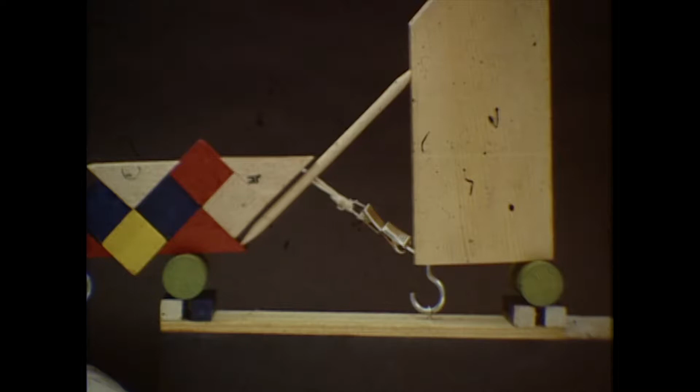This is one of the very first works that I have done. It's nice because it's related to a music school in St. Gallen, a music school for children. They had an auditorium here, and needed to extend it into the next room. So we simply had to take away the wall in between, which was something like 20 feet, or maybe a little less, by 10 feet high. And just to support the three floors above, it was necessary to build a frame. So it came to this piece here.

The idea of the piece is very simple. It has two parts done in metal, symmetric, and they are supported here on a support that goes along the wall. So a person will be something like that—here. This is a simple support, and then there are five tensional elements. Five.

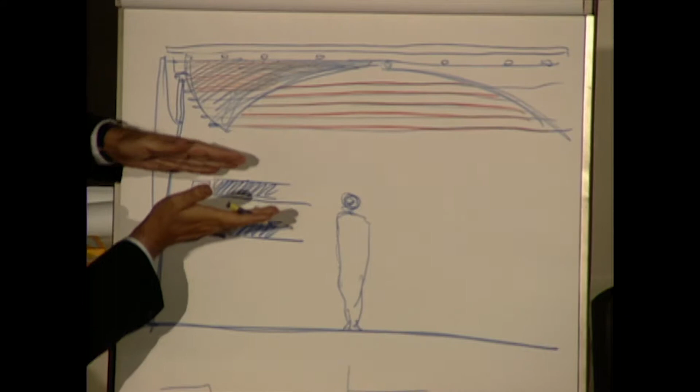I also decided I should not use any bonding system. The key of the evolution of technology in steel is very strongly related not only to the quality of the steel you produce, but also to the links between the steel. When you bolt, when you rivet, or when you weld, this makes an extremely big difference in the use of steel, in the possibilities and in the capacity.

So I decided to not use any link. So, for example, if this element is working in tension, I have to turn it back and link it where the exchange of the forces is happening, at this point behind.

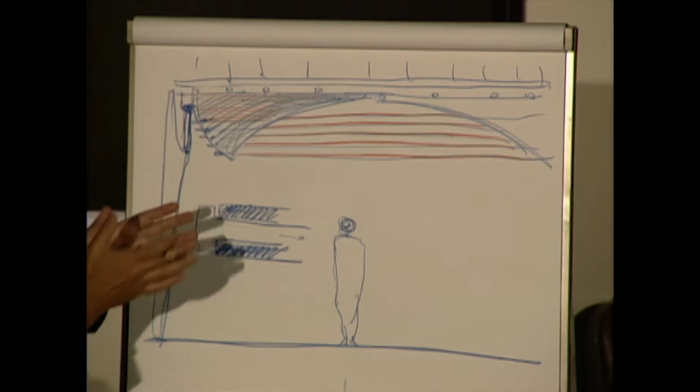Even here, the forces, the weight coming here, and even this small plate — this is just a pendular support, and it is held with 2 pins. So in a way, it is like working with a castle of playing cards, and then, of course, the frame of the building itself is used to stabilize the whole thing — the upper part of the building and also the side, which stabilizes this column and brings the force here.

So this is the first statement.

This was, of course, also possible because the people working on it possessed a very high level of craftsmanship, to make it in a very big and very precise way.

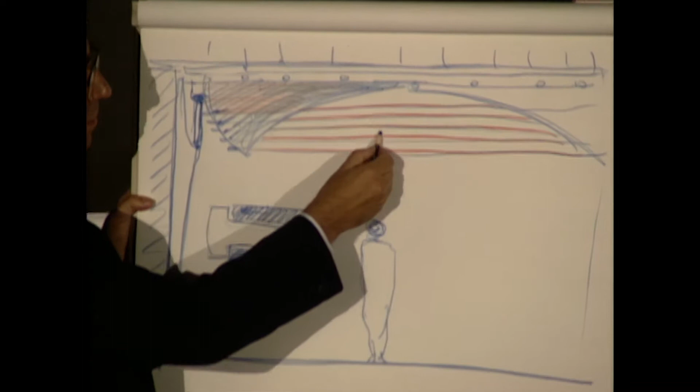So, in this type of approach, there is always a little bit of a place for the 5 elements. In fact, the rotation point is here, and each one of them receives, if not equal force — of course, because those who are more separated have a major movement when this will descend — but in any case, all work under tension.

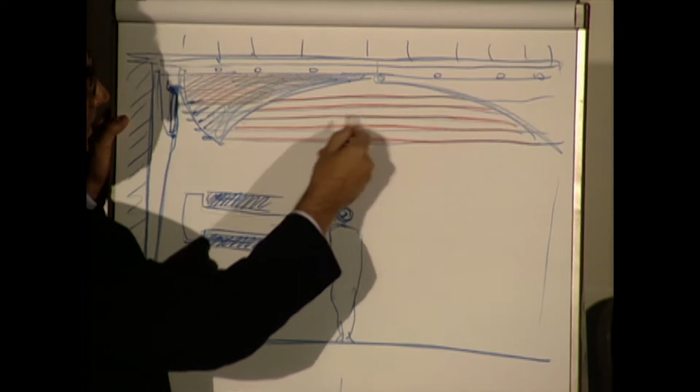I chose 5 and start to do 1, which is a redundancy, you understand? I could also even use 2, and say if 1 will not work, there will be another 1 who will work.

But I decided to do 5 because, as you know, music is read over 5 lines. And I found it is a good reason to introduce this — it could also maybe suggest a guitar or something like that, but this is certainly not the case. The 5 lines, in any case, is something like when you started putting the note. Yeah, okay, you see it here, thank you.

You see it here, the pendular element here, and then the 5 other.

I discovered along the way that the width of the tensional members was so big that they were simply hanging — even though working, I neglected the problem of the own weight of the element. This, for example, in a cable-stayed bridge, will be fundamental, because it will even change the modulus.

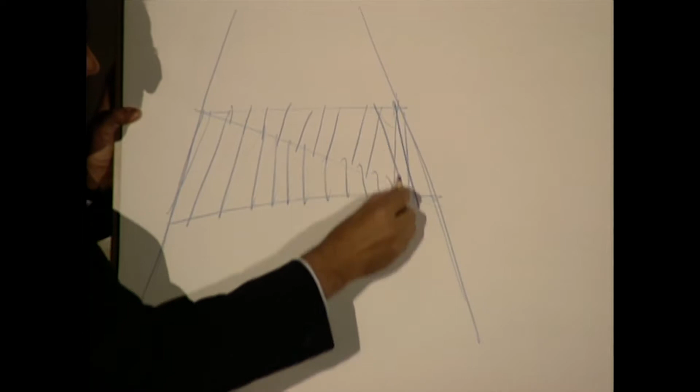I thought it could also be interesting to work with the light, which in my opinion is the control of the light for the particular space. And this is the entrance. The idea of the entrance was generated by the fact that the plan was like that, and then with a diagonal element I create a canopy very strongly related to geometry, which will consist in recreating two cones with a diagonal position arc and with the entrance here.

And this will work like that, and like that in the other direction. And not only like this, but also to have the cross-section with the pipe, which has a certain resistance to the torsion, and will take also the gutter with it, to have it related to the facade.

Even though this has a torsional stiffness that I have maybe used also in other things like bridges, the torsional stiffness of the pipe, in this case I fix it into the top of the facade, with which I create a link between facade and canopy. So the facade and the canopy work together, they are solved in the same gesture, and they are also coherent.

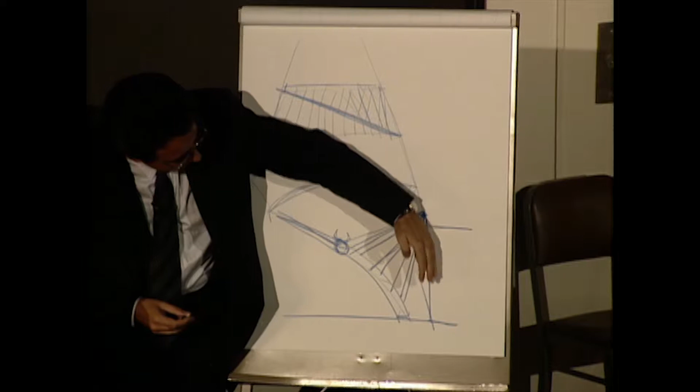It was a small intervention, but for me, as I tell you, it was like a kind of experimental workshop, very, very important. Also, it was a time in which the relation with the craftsman became for me also a kind of prolongation of new school.

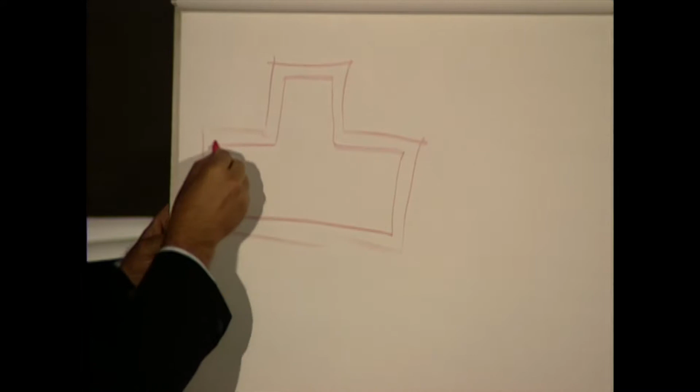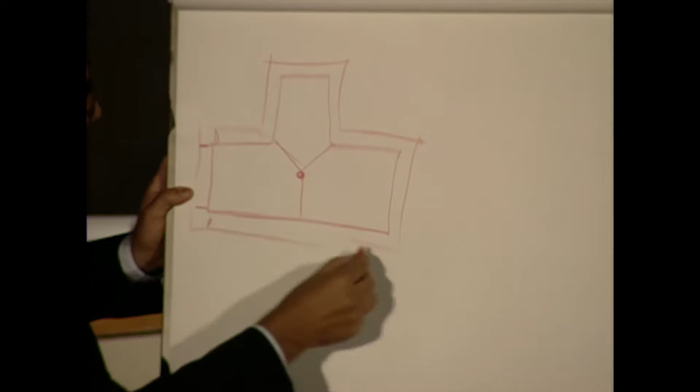And then, having as a plan such a situation, I thought this is the position of the roof. So the plan of the roof was very rigid, and then I chose a center, let's say almost the center of gravity—it's not the case—and then I decided to hold just laterally the corners, in order that it doesn't move laterally, that it is well fixed. But the whole support, the weight, is going through the central column in which also the water is coming down. And then light will descend along the walls, tangentially.

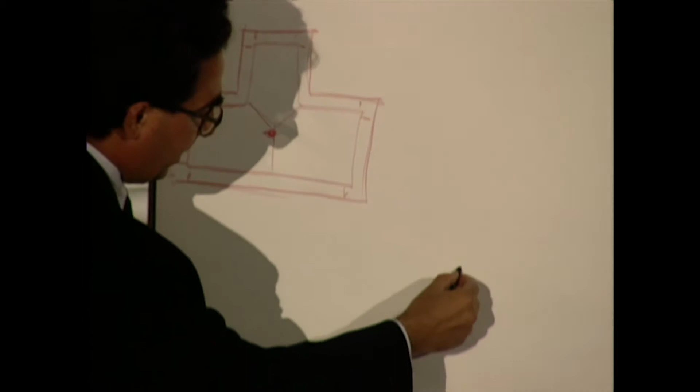Now, about the genesis of the idea, I think it's also important to signify that here I started thinking, let's say, on the idea of a book, an open book.

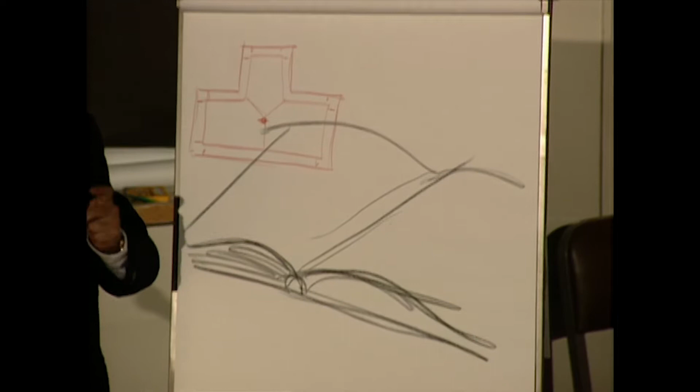Also, as in several other cases, you see very much the idea of the elevation of the roof, emphasizing the idea of floating. The roof should float, which is also a theme where the idea of lightness is very much given, because of the contraposition of materials or of static systems, as with the spindle before - the support of the roof in relation to the roof itself. Even if this is heavy and this is light, you see this contraposition of the two materials.

And the light coming on the side will make the whole roof seem to fly. It means the book, which was in fact the basis of the shell, was also conceived like this.

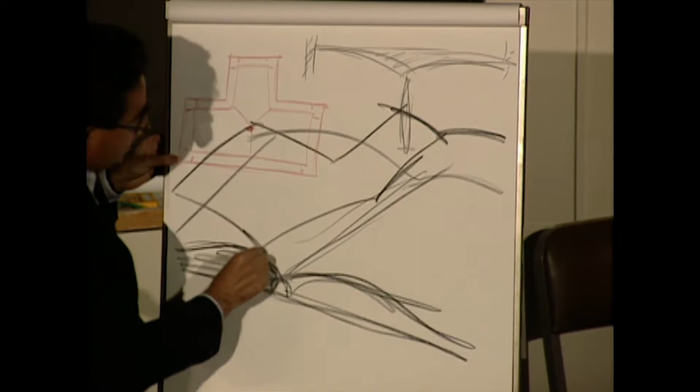So in a way it wanted to become, on the other side, something like a bird or something like that. It is a kind of superposition of ideas, but coming simply from the idea of a book - because if you look, you see it here also. I don't have any, but you see it's the idea of a leaf, or something like that, held in this support.

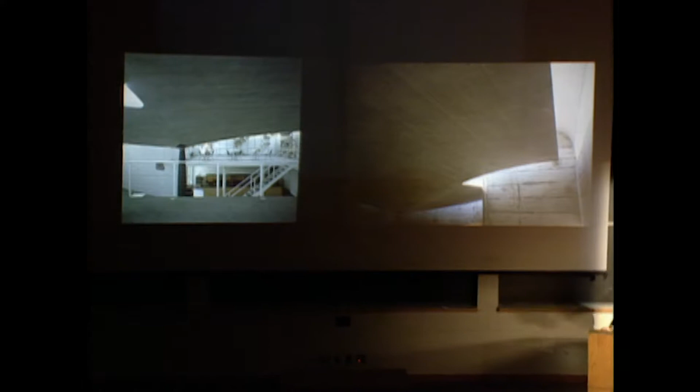You see here also the corners with the supports that I showed before, and the small links just to stabilize the shell, which turns around. And here the interior of the Libreria with the shell, very close - the physical presence of the shell at the interior was also very important.

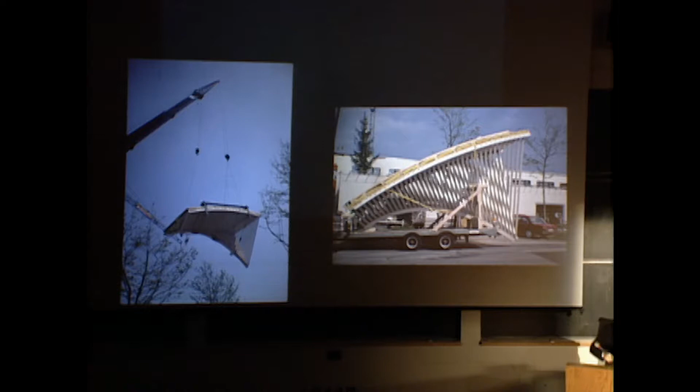Now something that is also very interesting is the construction process - how you build things, how people work. Sometimes the way you decide to build things decides also the shape and width of them, because you have to transport them, produce them somewhere and transport it. It's sometimes very important to recognize those things. In my opinion they have never been decisive until now, but they influence very much the way things are done.

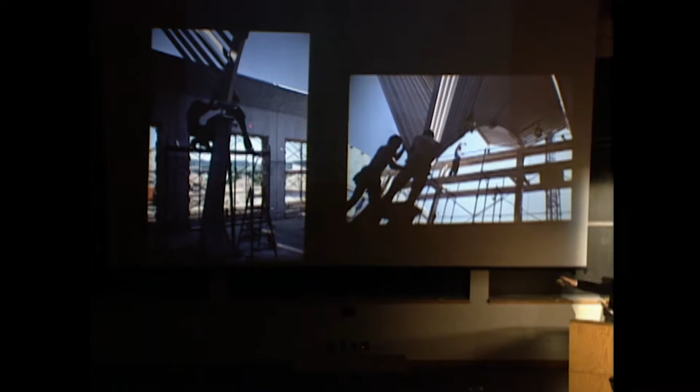Here you see parts of the roof of the aula being transported, and here how they were put over the roof - making a wooden shell there, with arcs at the interior. You see also here how they came down and the joint - this is also very interesting, the fact of the column, the supports.

Something else is very interesting, especially when you precast - I like very much brute concrete, concrete done on site, but precasting concrete can also be very nice. This is a formwork, because the freedom in the choice of forms and the complexity you can achieve is even greater. Remember, concrete in my mother language, in Valencia, we used to say formigó. Formigó comes from forma - in Spanish you also say hormigón with H - which means the material that you can give a form. This may be a good definition of concrete.

So you are very free choosing the shape, the quality, the texture and many other things. When we wanted to produce the pillars of this space, if you have to do a formwork that's 3 meters high, once you fill it you get a huge pressure, and then you have to do a very complex formwork and pay a lot of money for it. So how to do that with less money? Just cut the column in two, make two formworks, pour it horizontally, and then glue the two parts. This is what we have done here.

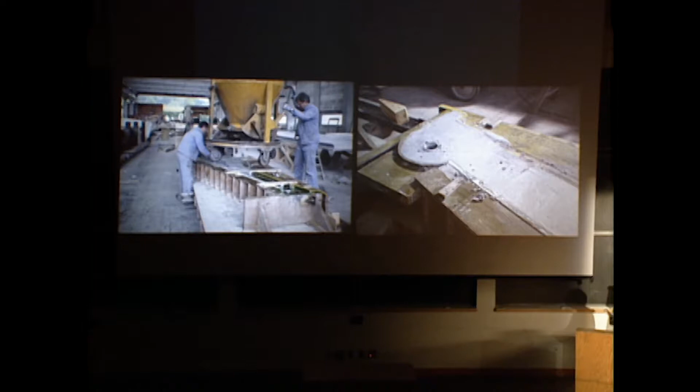You see here the two parts of the column, produced horizontally. It has another advantage - almost all the parts have a formwork, so even the base, everything is enclosed. You don't have any place where you've been casting the concrete in the open. Here you see a concluded column.

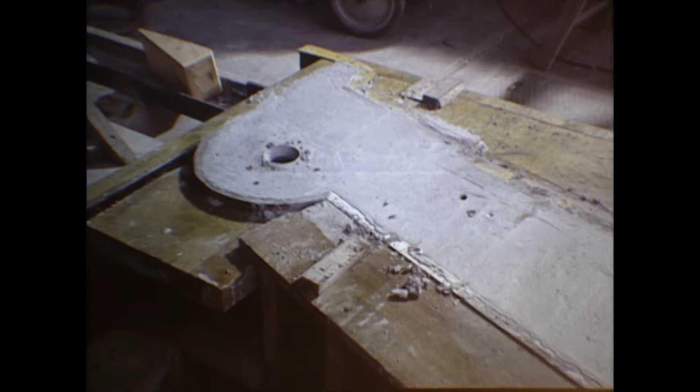You see here also a detail of the joint that we will have later on, and here also taking away, putting the two forms - this should be the other way around, but it doesn't matter - and taking it out from the formwork. And here also how the columns work together. Then we use epoxy and also pins, in order to have resistance into the shear forces, a transversal resistance.

And you see, these are the concluded columns, and this is the site when we have been putting the columns there.

Then you see also always on the side, I decided to put a small plate here because the link between wood and concrete is done by this plate and another transversal plate coming in, and this is the pin who links the plate and defines, in a way, the articulation.

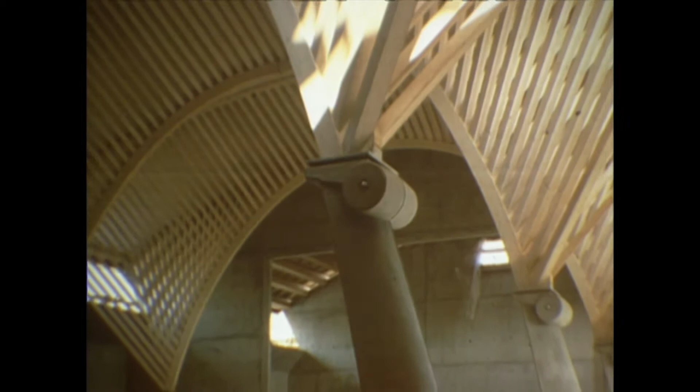You can always read the joint of the column, you see the vertical joint. And then these are some views of the aula when it was concluded.

So if I may give you some references for this shape, what I wanted to achieve was quite simple. I proposed, this time, not to put the roof into the wall, but to make it emerge here. And then to create a parabolic arc at the interior.

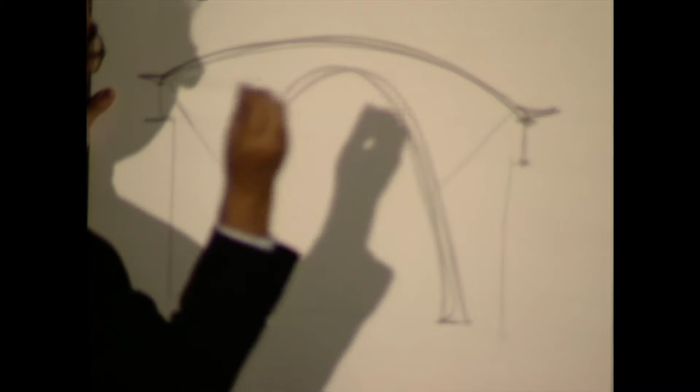Parabolic arc. And then to have here the shell, independent, and a gutter on both sides. And then to have a very light longitudinal window, because this will also bring light into the interior and emphasize very softly the lighting, also bringing transparency with all those elements which are all regular and equal, all the same size.

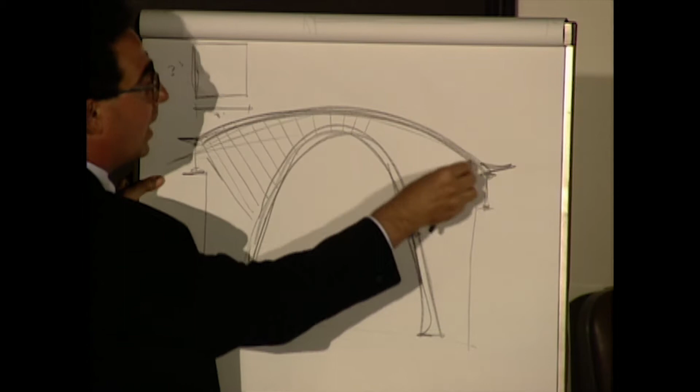They are all pieces of wood, something like 3 inches by 3 inches, very standardized. This is a laminated wooden arc, and this is another one. And in the top, I have the shell, a contreplaqué of wood over there. And this is the head of the column that you saw before.

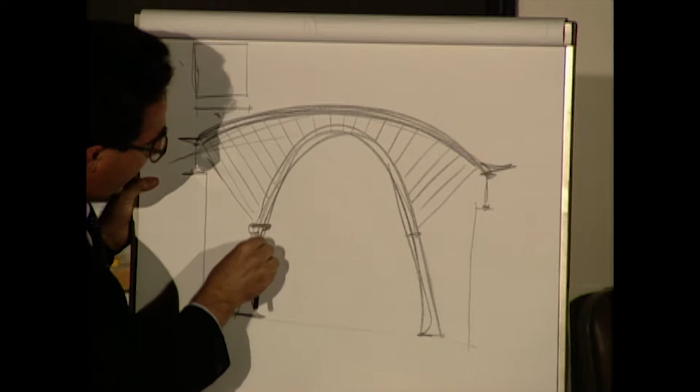This is a bit wider in proportion. A person is something like that in relation to the whole thing, and someone sitting will be something like this. But this is much wider, you see. And this is the link.

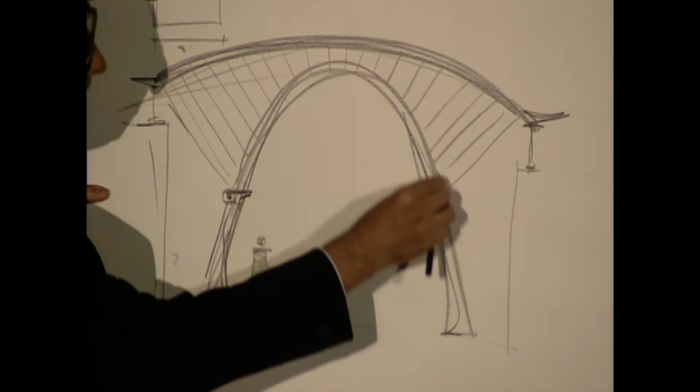So basically, this is a parabolic arc holding the weight of the whole roof inside. And the weight itself is stabilized by those oblique elements which are just bringing the weight of the roof into this arc.

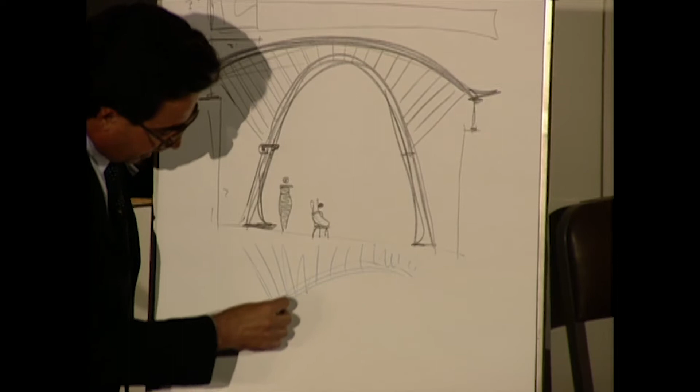Maybe another interesting point, it is again, like in the entrance, the idea of a palm tree. And also, this is maybe very figurative, but I feel very free, at least at this time. I continue feeling like that. But I was thinking, I would like to express the idea of the force coming here.

Many people think this is a kind of reminiscence of a Corinthian capital, which it is not the case. It's more the head of... because it's interesting, a Corinthian capital could also be the head of the women. So, we are not very far away.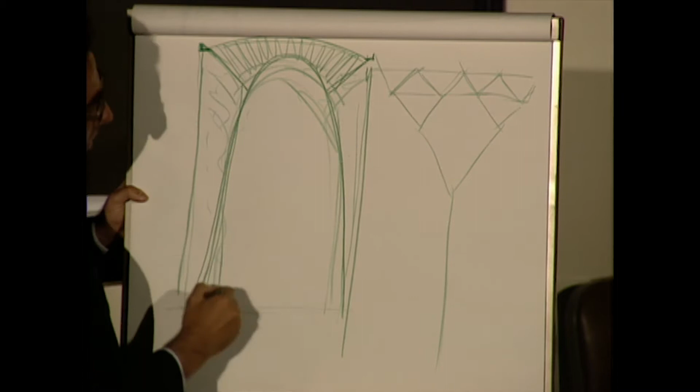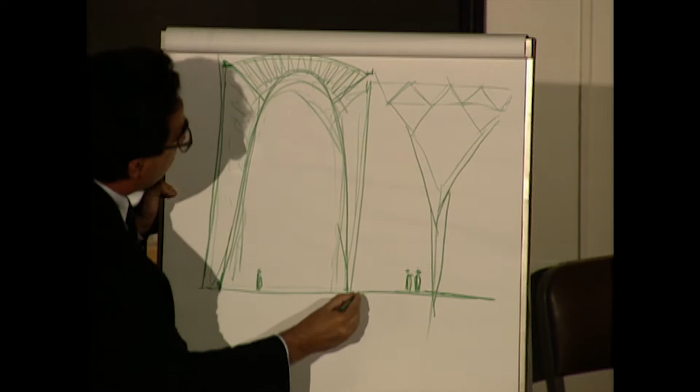This can be the elevation a person made — something like that, because in this case the height is about 22 meters, a bit higher than before. However, the whole thing stays independent of the surrounding buildings.

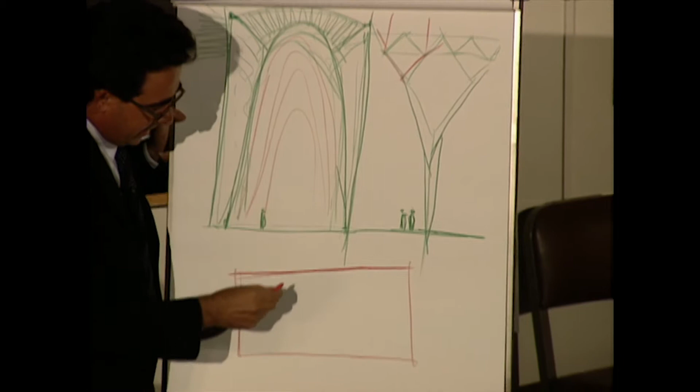Something that also encouraged me, though it wasn't decisive, was to bring this idea of the tree and the alley of trees — looking in perspective, there are many of those trees. It's the fact that, as you know, this was in Canada, and Canada is one of the few countries, except Lebanon, that makes reference to a tree in its flag. It has the maple leaf, and I think it's so beautiful to have a tree as a sign. I thought, well, this certainly works with the whole idea.

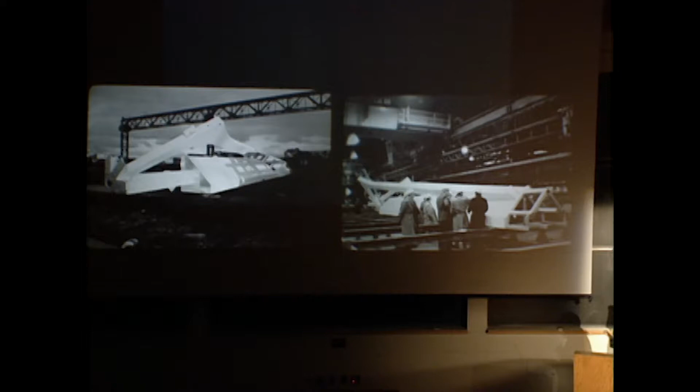If we can get this a little better focused, you see, once you see those photographs, for me, as a European, this is very much North America. The pieces are so big, and the shops are ready to do those unbelievable big pieces. They take just half of a building, build it at once, and then bring it.

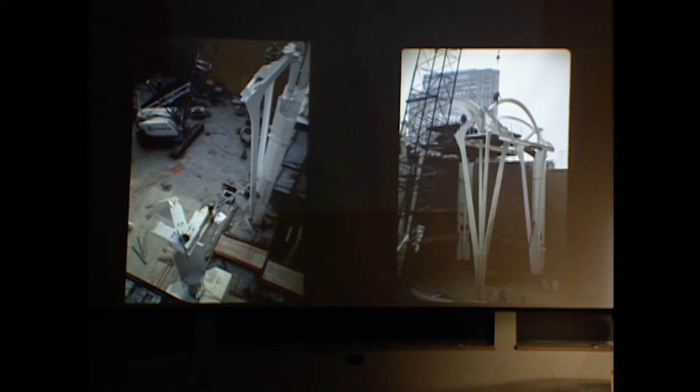Then you see here also during the montage of the trees at the interior, always you see welding on the side, a lot of welding, and also a lot of bolts, links, and welding links you see also during the montage of the trees at the interior.

And here at the end of the whole operation, this is during the night, you see at the end the plaza and then the Galleria through.

Now, you see, this is a completely different context, which is also very much related to the use of materials. You see, working in a very old building, in which you maybe have reminiscence of parts of the building that are, let's say, 700 years old, something like that.

This is a building in Basel, in Spalenhof. It's one of the oldest. This was where the city council used to be, the very first city council, and then they moved into the actual old city council. So the building is one of the very, very old buildings in Basel, with wooden structures and also stone structures.

We have had to respect and treat these structures with a lot of care, and also to treat them in accord with the people who are specialized in the treatment of it.

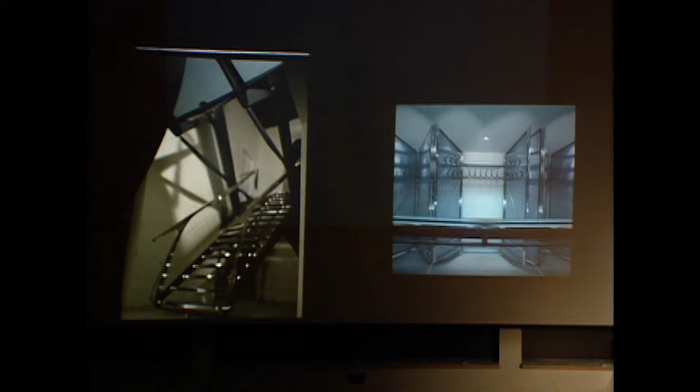Then a staircase going up into the upper level, in which the theater was. You see here the staircase, done using glass, from down to up, and from up going down.

And then this big piece of metal, you see, holding a big load on the other side coming up. Because one of the other things we needed to do is create new static conditions for the new loads of the several theaters and the new uses of the house according to the new codes.

You see here again the staircase as a single piece, in the center of the building, and then through the staircase into the saal, in which this is put horizontal now, and you see here the wall, which is one of the oldest walls at the end of the space.

This is a Gothic Saal, for example. Here you see a Gothic Saal with the staircase, and then you have the bridge going from the Gothic Saal into the other saal. So you come in here, you go up, you go into the Gothic Saal, and then into the space.

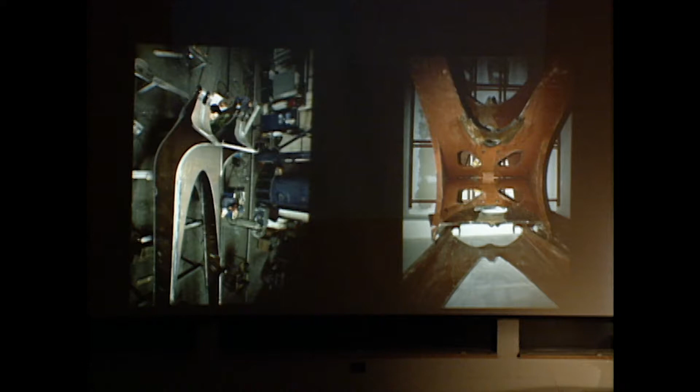Here, during the construction of the piece, you see those are the steel pieces, and here you have the people working on the shop, putting the pieces together. Many of the connection details were necessary to do on the shop, discussing with the people, not only calculating but also very much by hand, saying how to connect. You see here how to do the holes, the details of the connection, the joints, and many of those things. So in a way, the work of a main structural piece can become very much like a sculpture.

You see here also this is the interior space of the saal, and this is the garderobe. So basically we have done two new rooms. This is one, and this is another one.

And then you see also here some details of the beams, and also here the garderobe. The garderobe is interesting because being in this space, I wanted to touch it as little as possible, but however, it has to work as a garderobe, so it has mirrors, and then it could be deployed and opened for the upper saal.

Then this is also the bar at the interior, which could be opened and closed. And also the windows - I have to darken the space, and then they can open and close, like a jacket when you get hot.

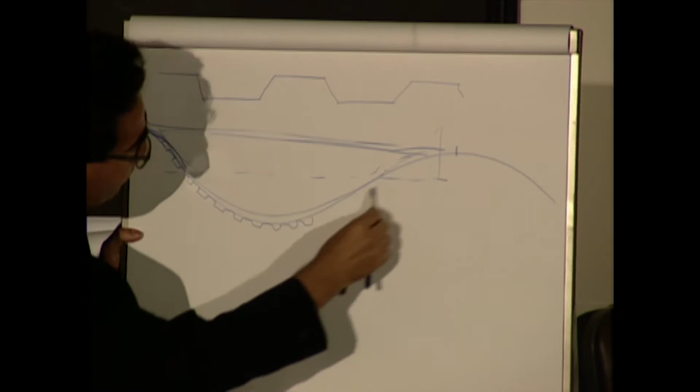Then in order to emphasize this movement in cross-section, we cut them like this and like that, so that even looking from the front, the view of the sinusoid is even more accentuated. Even looking at the top of the building, the view of the sinusoid is clear and readable.

Also, even though this is also aluminum, it's put inclined, so it appears black because it's under shadow, or it catches the light in another way.

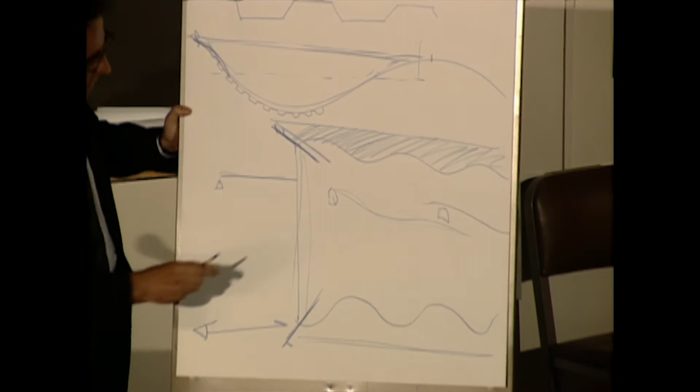Then, in order to make it more plastic and readable, the client came and said, for safety reasons, I need a lot of light in this area. So we put lamps to the exterior of the facade, small lamps. But we took them far away from the facade so you would also see the shadow of the lamps following the curves from time to time, making drawings in the facade, not only the vertical component. This creates quite a plastic relation.

Interesting also is that this is the south facade, meaning the movement of the day and the hours of the day will also make a very significant change in the facade itself.

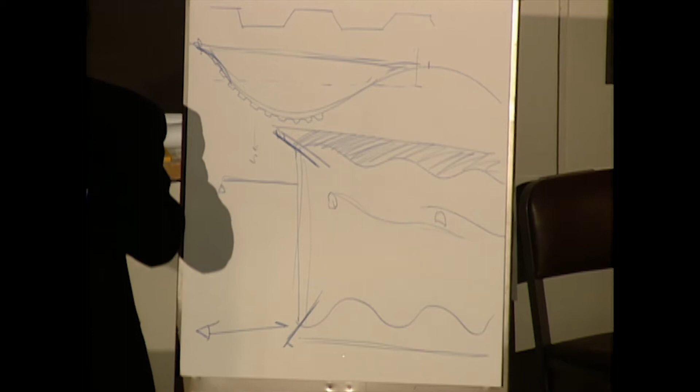This is also, depending on the hours of the day, a facade that is extremely sensible, especially when you get a very raking light, or a vertical one. And what's also interesting is this shadow here, which is also pure aluminum.

And here also you see the cut I spoke of before, with the way it floats and moves over the concrete structure.

Then there was the other theme, the north facade. I spoke about the problem of verticality being very generous in the south facade. Now in the north facade, the problem was different because the north facade has just zenith light, a very diffuse light. So how to emphasize the plasticity of a thing in zenith light?

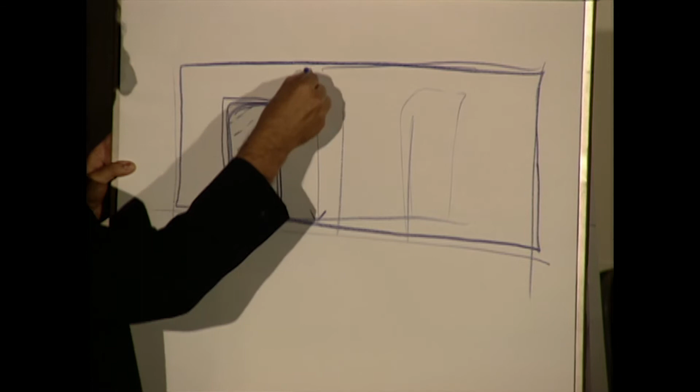And then in framing the whole thing, using those 17 meter high vertical lines, and presenting a very flat facade, during the day when the sun turns, those elements have the tendency also to give a shadow against that, and then it became much more plastic. Also that here, with a small service door, for here in the corner.

This is another point - each one of those facades could be conceived like a separate picture. Also the corner here, the corner was very important, expecting to put here a sculpture, which until today has not happened. Just at the time it was for economical reasons. Maybe one of those days it will be there.

Now, to give a global idea - well, before that I have to explain you also the doors, the west facade, in opposition to the east facade, having almost the same light condition, sun rising and sun setting. This was also done using those very big panels, those very big panels. And then you see the lamps and the doors when they are closed.

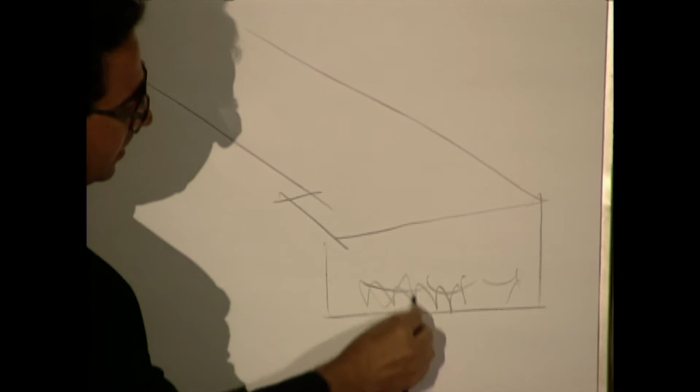If I do an axonometric of the building, we could say this is one side, then I have here the gates and doors, and then this is the building. Lorries come in and out every day, a lot of them. Many lorries wait at the doors, the big gates open, and the lorries come in and go out.

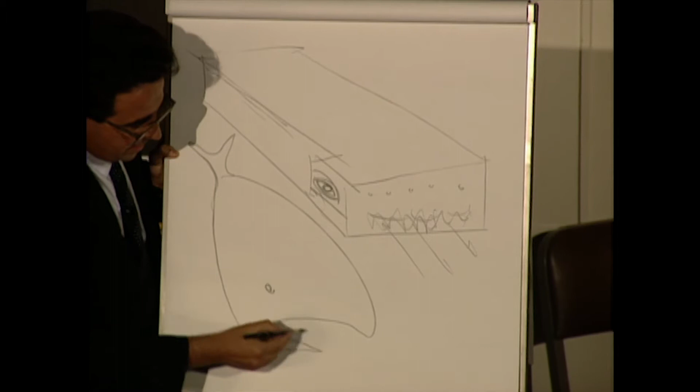If I put the sculpture of the eye with those here, you see the whole building became a little bit like... so the whole building is a kind of, and the lorries coming out and in, it's like the history of Jonas.

I want also to do another small drawing. This is very famous, you know that, isn't it? It is the elephant and the snake of Saint-Exupéry. This kind of game is important, the idea of, in the beginning, the toy of the children. It's the toy of my children, I make that with the toys of my children. It was an exercise for me to take the toys of my children and things of my house, the curtains, pencils, whatever I found, to do that.

In a way, it's also a matter of, the elementarity of the thought takes absolutely no force from the complexity of the solution. In the beginning, something can be extremely spontaneous and simple. I want to walk, where I am going, that's the question. But to walk is just a very natural thing, the thing is where my steps are bringing me. I am also arriving there step by step, and a step is a very simple thing. And a very long trip needs to be started in a small step.

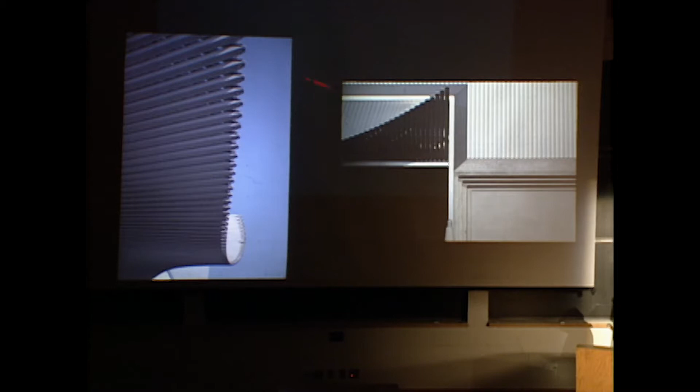I would like to jump to another subject that will show you that in many buildings, the construction process can be more or less relevant. When you are working as an engineer, the construction process is fundamental. For example, cantilevering bridges built in a process of cantilevering. The construction process is fundamental to understand the shape of the bridge, or many other types of buildings.

In this case, it was not so much the construction process of the bridge itself, but the construction process of all the sides. This is a bridge in Valencia, and I would like to focus your attention not on the bridge itself, but on how it was built. The bridge is over an underground station. There is a plaza down the bridge. This is the arc, and the arc is inclined.

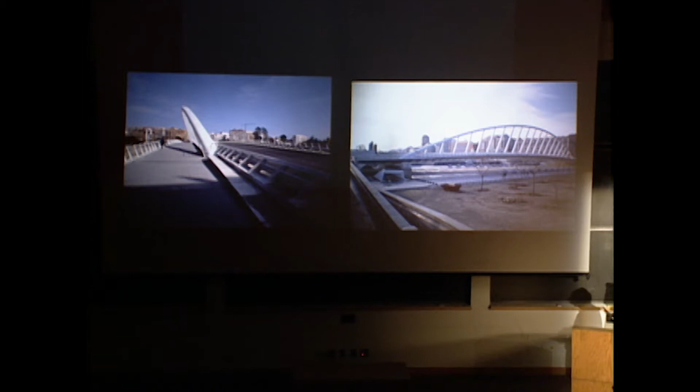I wanted to do an arc that incorporates into the city as a kind of big sculpture. And then you have here this light coming out from the ground. You see here also the bridge over the plaza, and there is, as I told you, a station here down for the underground. So people come down and go into the station. You see the entrance into the station, and some details of the plaza itself covered by the bridge. Here also the plaza from the front, with the light cannons bringing light into the station.

Here also you see an interesting thing. The underground, of course, doesn't work the whole day. It works only, let's say, until 1 o'clock, and then until 4 or 5 o'clock it's closed. So I designed the entrances into the underground so they can be locked. In the night, the entrance disappears, or let's say it becomes almost part of the ground floor. You see it here when it is closed, how it looks, and there, behind, it is open. This is the process of opening.

The interior is also a very interesting material. It's very traditional, especially from our area, from Valencia. Even if the most brilliant exponents are in Barcelona, in the works of Gaudí, in our region there are a lot of small broken pieces of ceramic used for cladding. We used these broken pieces of ceramic cladding the whole interior of the station, and also white concrete. This is the station interior, and this is daylight.

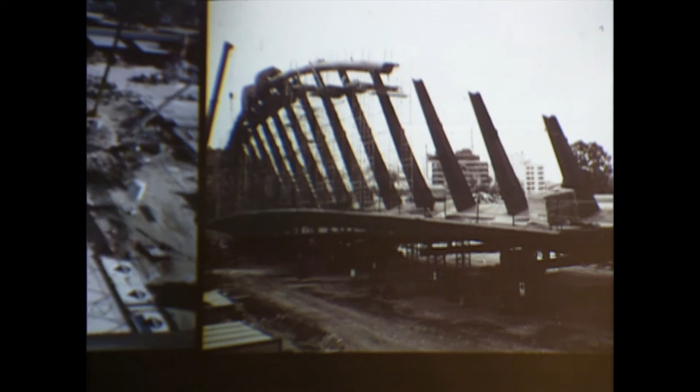And then this is the site during construction. You see, here is the bridge, and here is the whole of the station. This is the bridge during construction, and here was the site in which the station was being built.

Then you see the bridge here before it was transported, and here, in this case, over the station. And to transport it, we just pull it.

You see it here, this is the people watching. It took just several hours. The bridge started here, and then moves as the people watch, almost like...

Interesting also to see the cross-section of the bridge. You see the box girder, which holds the torsion of the eccentricity and the inclined arc.

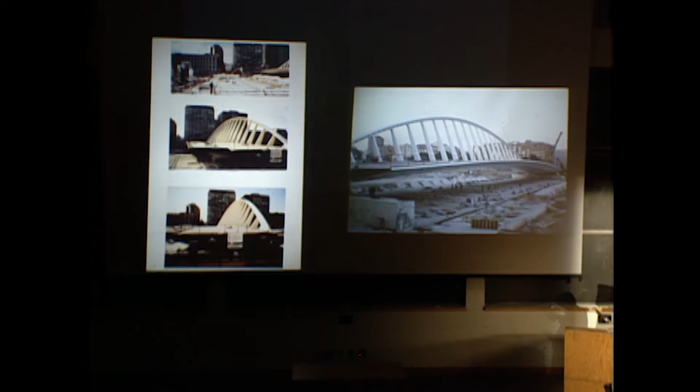And then also, looking from the other side, you see the bridge in one etape, in another etape, and almost in the definitive position. Here the bridge just after arriving into its definitive position.

As you see, also some views of the bridge concluded, with the open gate and the closed gate of the station, just to signify that the station is still there. Now another project, in which what I would like to signify is...

I could also speak in this project about the relation between city and project and architecture, but I would like very much to resume my intervention to the material and to the construction difficulties that we have had, and about the basic idea of each one of those projects.

In this case, I would like to explain this: you see, the station is situated on a hill. In a small scale, this is the Lake of Zurich. The lake used to arrive here, and then this is a moraine hill.

From the glacier. There was a lot of trees here, and then people arrived and made the walls of the sea here, and then this becomes a flat area, and then they started building here.

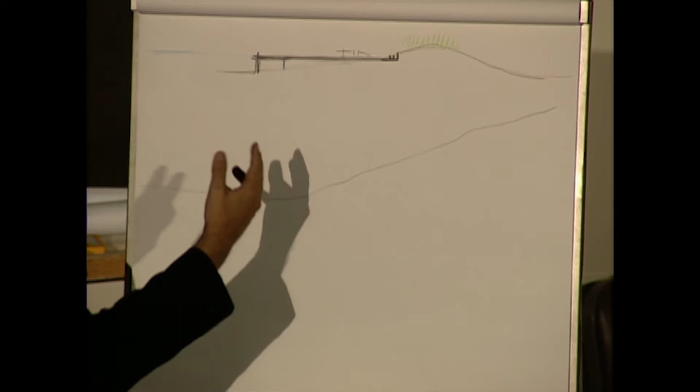Later on, the railroad came and made a cut here, leaving 2 lines. Our exercise was, in the situation of the moraine, to enlarge the station and make it into a major station with a lot of traffic. Sometimes we have a train every 2 minutes. It's a very heavy traffic station, important also for the whole regional scheme.

And so now looking to this particular element, I would like to emphasize the different character of the two parts, which is still conserved today. This is very urban, and this is very green, with the very first houses built outside of the city. Schools, and so the whole hill has a different character from here.

And now you see the new intervention has considered the fact that there was a cut here, and that we had to step back and cut more into the hill. In this situation, the decision, the basic idea, was that I would like very much to conserve this border here, and also this situation there.

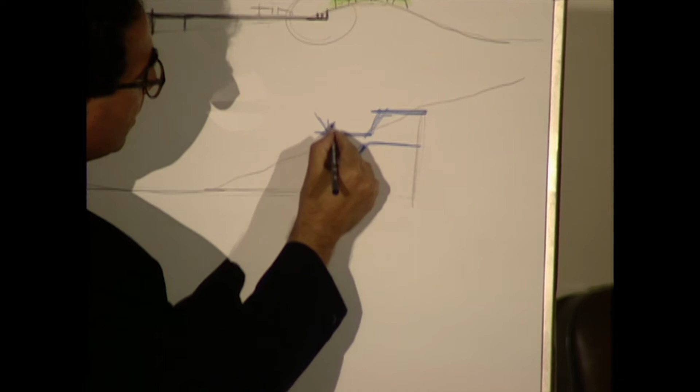And for that, we propose a structure that will permit a wall, with permanent anchorage. I will explain also why permanent anchorage, which will hold the houses, which are sometimes here.

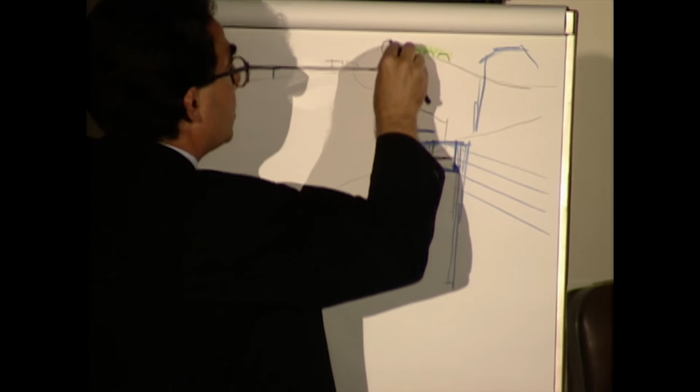And even sometimes, in a particular case, we even hold a tree, a big tree. And then we recreate gardens here and a pergola.

This is conserving very much the character of the upper part, and leaving here the possibility of people promenading over there, and also people waiting here for the trains.

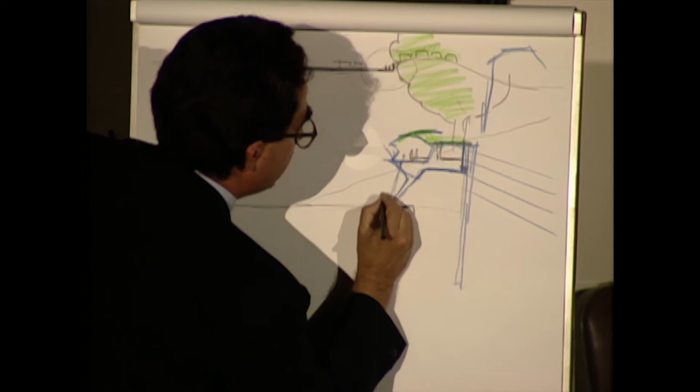Then having here an element to heat this part, leaving all the anchorage accessible, or part of the anchorage in any case accessible for supervision reasons, and then having here the other 2 lines and recreating in the underground.

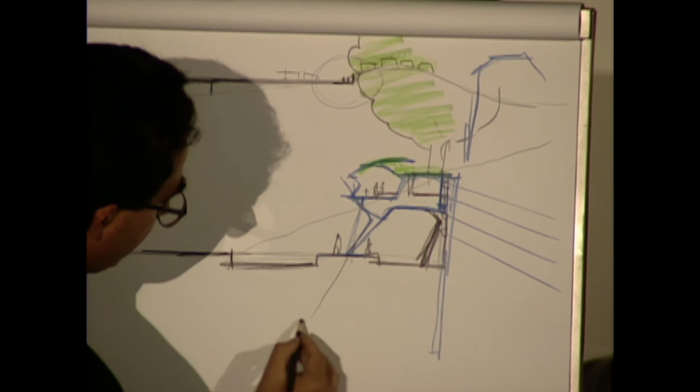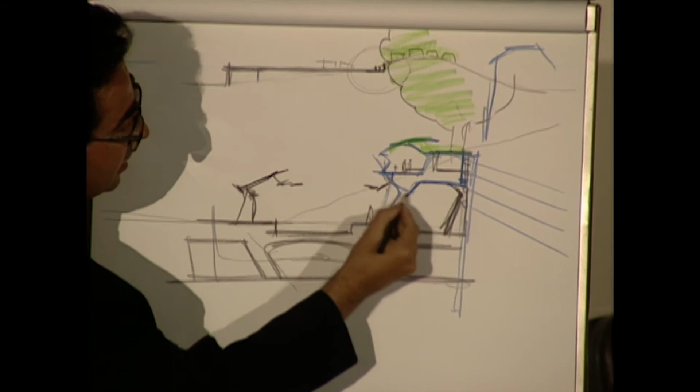Even a shop mall permits also to make more safe and more interesting the link, and also to have a series of shops in the underground who works. And then you see, in contrast to that, putting here a light canopy, and then having the suspension of the catenaries, and then the trains here.

So this is a little bit the scheme of the station. You see, just so you recognize the scale, you will find something like that. Now, as much as in many other projects, there is always, in my opinion, necessary to take a little bit an approach to the problem. First of all, relating it to the city. Second, relating it to the construction.

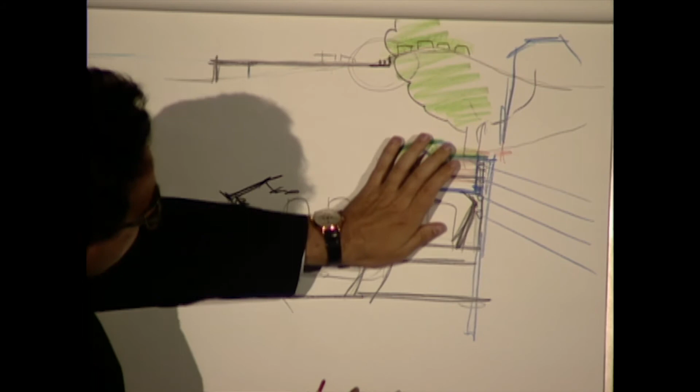For example, all this area here became very heavy because we have earth, we have the gardens here. As I tell you, the houses are here. It was necessary for safety reasons to make an independence between the wall and this part, as much as this part can maybe fall, but the wall will still stay there and the houses will be safe, for example in case of incident at the interior of the station. And many other thoughts like that, of technical nature, which was conditioning not only the process of

construction, because sometimes we have had from here to there something only like, let's say 90 feet, something like that. So houses were here, so it was very narrow, and sometimes we are getting here into the ground, also for technical needs, and we are getting down to 45 feet into the ground, which is quite a lot. And so it was the site by itself.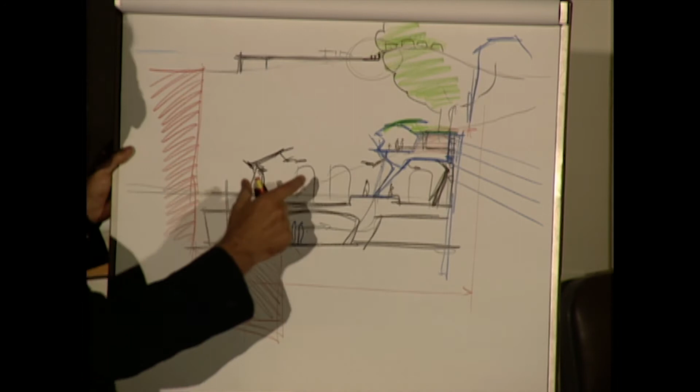Also the fact that we have had to build that while leaving the train circulate the whole time, so the traffic in the station was never interrupted. So it was quite a challenge in such a tight site, to eat up and to remove, to try to combine all the safety of the use of the station during the construction, and at the same time, sometimes we had, I think, at least 27 meters between the space in which we could work. So this was quite an interesting thing.

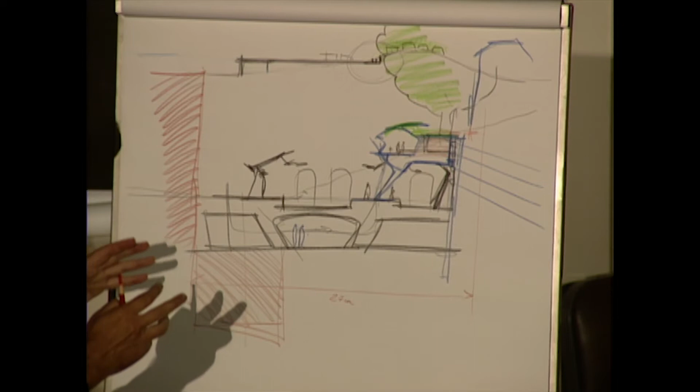But however, I think the reading of the station also needs to be another one than the pure technical one. And even if the technical problems were quite a challenge, and I was quite nervous because it was one of the first jobs, and being responsible on one side of the architecture, but also of the engineering, was quite a big thing, I thought, well, we should also have a little bit of fun with the station.

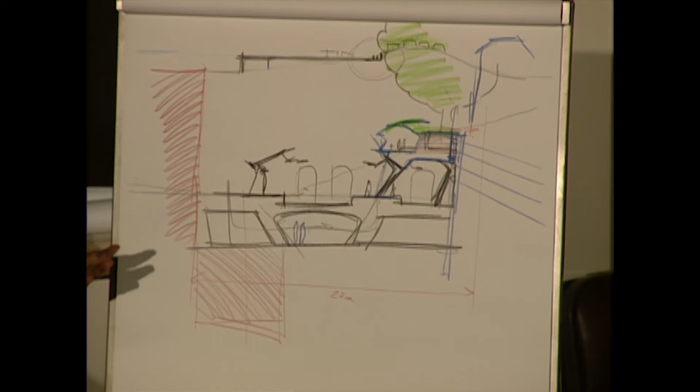And the basic idea of the station is not only the whole functional complex and also the urban context, there is another one. I wanted for the first time to experiment with the body, with anatomic thoughts. And I thought on the gesture, and I started with my hand. And the first thing was the idea of the hand, an open hand, which is a matter of sincerity and openness and everything.

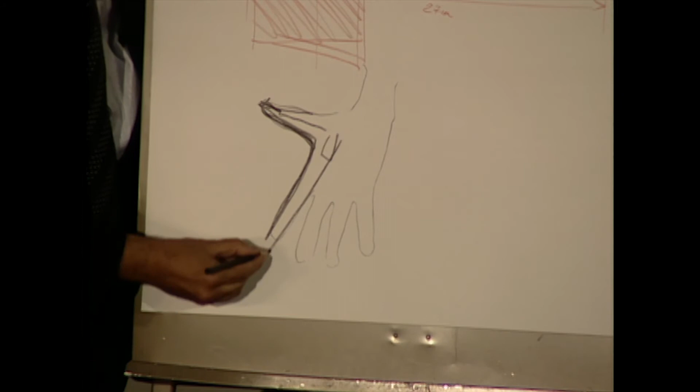And from the open hand, I chose this part. And this part becomes the column, also here in the corners, also there and here. You see the vault turning around with different pillars in steel. Here also a detail of the pipe in steel and the support and the pendular pillar here in the front. This is the place where we used to fix the clock.

Then you see here during the construction site, the shapes of the formworks coming from one side. This stage was finished, then we started from the other side coming in. Also a lot of provisional small bridges were necessary to be built. And then the train circulating during the construction. You see here a regular train in the station.

You see it also here from the top, we were very close to the houses around. And then this became the promenade. You see here the bridge in steel, prefabricated also to be mounted in the easiest way.

You see also here the same bridge with the connectors. For the concrete, it was a mixed structure with a concrete plate. Also other provisional structures, and here building the canopy. You see here very well a cut on the shape. Then you see the montage of one column.

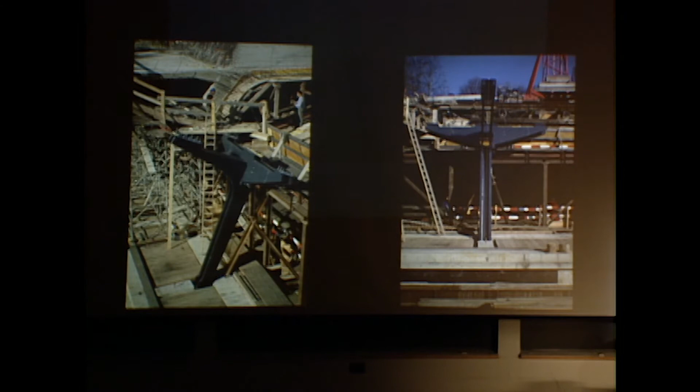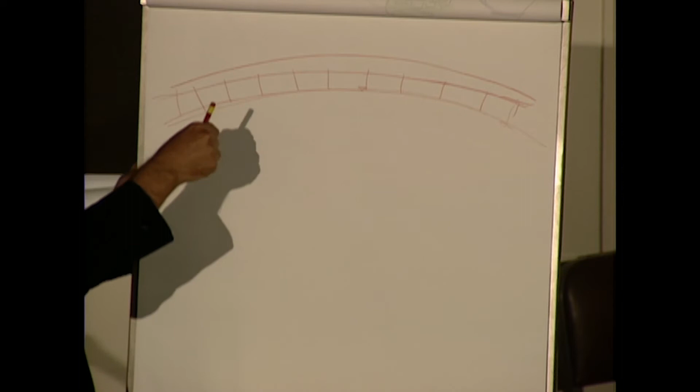This is also a point I should explain you very fast. The station is geodetic, it's not flat. A train is coming from a tunnel and going into a tunnel, and more or less the center is horizontal. So we built the whole station like that, and even the columns are like that, but you don't see it because they are also inclined. If they were vertical, you would immediately see it. In all directions they are inclined. Even the Galleria is like that. So the whole station is like a sausage, isn't it? It is all the same.

You see here also some details, the formworks, sometimes quite complex, with very good people making the concrete on site, very good people. There were 2 groups of people, unbelievably good. And this is the Galleria, just after the finish.

You see, this was the original project. Today they add many things, as it happens today. Everybody wants to put his name here, and then they have put plastic banks here at the interior, but it's life, isn't it?

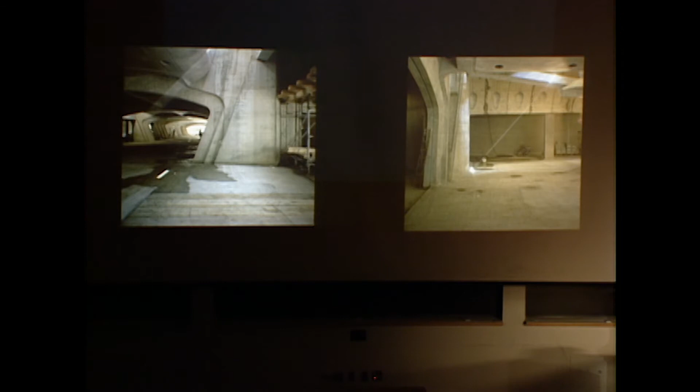Then you see here also, again during the site, always observe the site. The site can be extremely beautiful by itself, even in a certain disorder. Sometimes you have real openings and the sun comes into the interior, in a way that you will not see it later when it is concluded. In my opinion, a site, if you like construction, is a very inspiring and beautiful place, where also the smell and all kinds of smells, of course.

Then you see here the formworks, and also the joints. When you work with exposed concrete, you have to take a lot of care with all the things. You have to coordinate very well the installation, for example, not suspended ceilings.

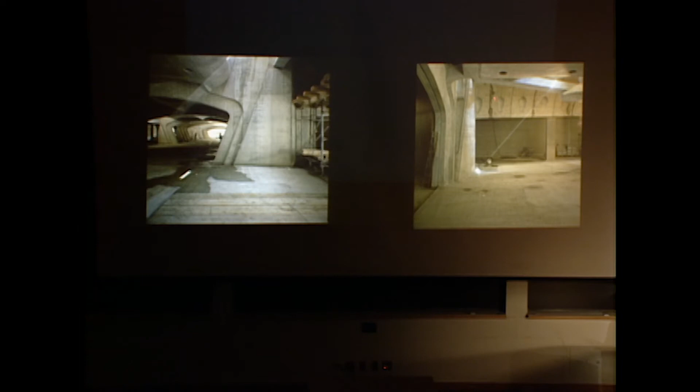Everything, just a moment, looking back, you see those are the holes for the lamps, and then all the lamps are here, the loudspeakers are here. Everything has to be incorporated, and the coordination between the project and the different types of installations and disciplines has to be very well coordinated. It needs a very big effort to achieve that effectively, the emergency lighting and the other lighting are all incorporated into the concrete. Also the lamps are part of the concrete, and loudspeakers are here and everything, so that the pure shape of the concrete comes out.

You see it here also, and this is also when you arrive. So another idea was to create a very strong structure who dominates the shop. But with time, you see the shops are dominating the situation, which is also natural. But the signage was also very austere, very little element to mark, because the way is so clear and so easy to find.

You see it here, this is a shop as it was in the beginning, and then the light. This is the concrete, this is this, and then the concrete over there. This is one column that we couldn't build, and then we had to suspend the whole with those 2 members.

Then you see here the curve of the station. This is another event, a pure engineering event. In plan and in elevation, the tracks were given by engineers. But the fact of having a curve, and then the possibility to look at the station, which is 280 meters length, about 880 or 900 feet length, it seems to be much longer because you don't see the end. The curve helps a lot, and the shape turns around like a toroid, having this kind of rotational geometry.

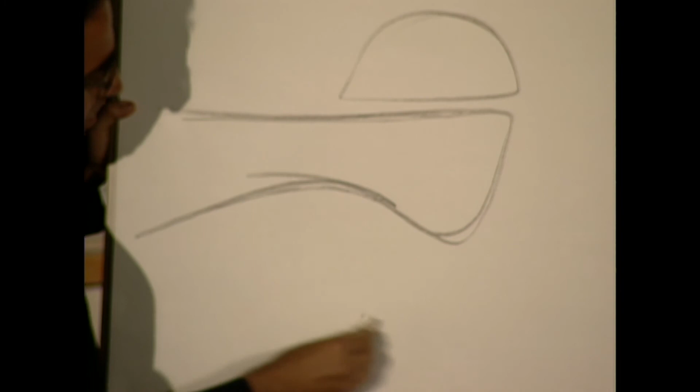Which it is possible to achieve not using extremely sophisticated elements. And so the idea of organicity, the idea of the detail — I mean, the idea of how a piece will link to the other in this place. So in which the detail by itself, and the shape of the detail, became by itself not only — I mean, more than the result of a very elaborate geometry — the result of...

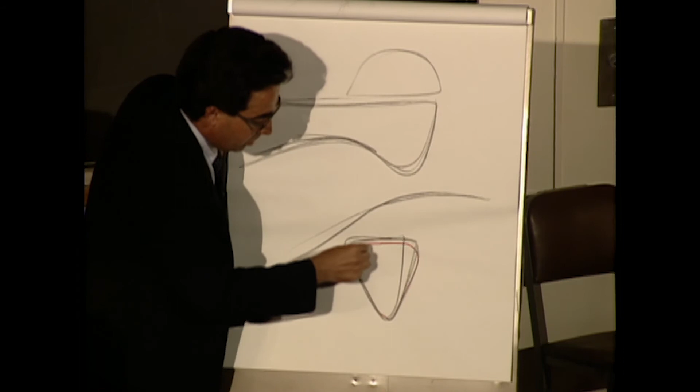This will be a section, for example, through here, and also it permits us to recreate, let's say, as a dream, the idea of the breast, you see, breast.

I will show you this project, but I will not comment on the construction. This is another station that follows the station of Stadelhofen. I think you have to consider that this object was built by extremely careful and gifted people who put their hands to this concrete, this metal, and everything.

It's also important to start watching buildings from the end side into the origin, not only from the origin into the end. It's beautiful to understand the site as a process, the way things are put together, and to get close to the people on the site, because they are fundamental. If someone risks their life, it's certainly not the architect—it's the people on the site who go up and do that.

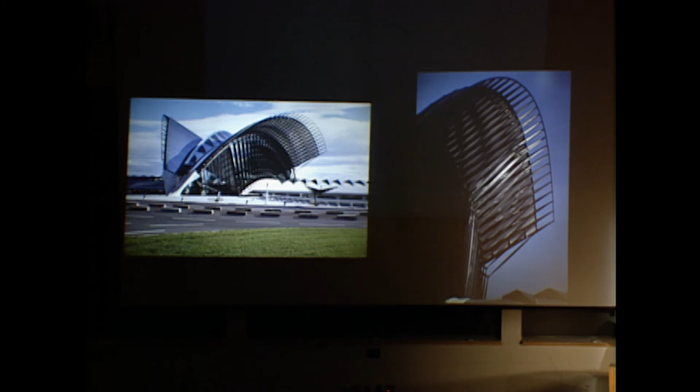Here is the gallery that brings you from the airport into the station, and the back of the station, the gallery from the other side with the roof in aluminum. Here's another view from the front, and here the wing, with some details of the wing.

This wing is all south-oriented, and we chose the inclination at the angle of the solstice. So after mid-June, the sun stays out of the interior of the space until November, then comes in again. This facade gets sunny light in the interior of the hall during the day, which permits a very low climatization.

The roof works, even though it is so open—here is the frontal support, with some details of the steel and the concrete, and the way this concrete is shaped. It's also, in my opinion, quite elephantic—a bit like the feet of an elephant touching the ground.

Here from the front, you see all the water pipes and supports of the roof. The roof is basically an arc of 140 meter span, and all the forces come into this point, into this area here.

Also here is, in my opinion, quite a nice detail how the concrete bends and also the border, sometimes sharp, sometimes flat, sometimes curved.

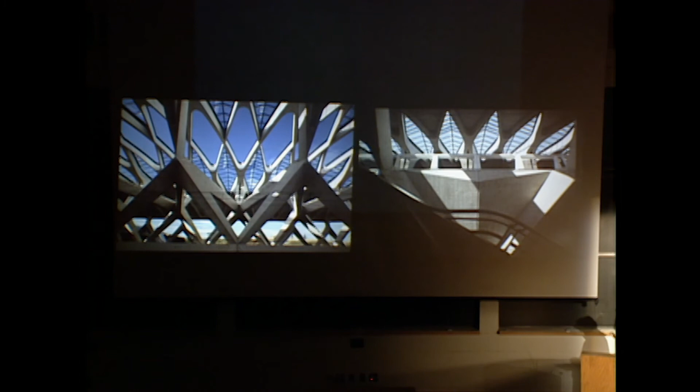You see also from outside how the sun penetrates, from the west side, into the interior of the structure.

And here also, this is a point I would like to sketch. I will do two sketches for this project. I think it is interesting. The first sketch is related to those elements. You see, I was interested...

...in the idea of recreating a structure based, in a way, on certain proportions strongly related to the human body. This is one idea. So many of them, you see, hold the station. And the whole thing becomes a kind of modular basis.

This is one point. And the second point, which I think is also very important to understand, is the roof. As you have seen, the shape of the station is that. Let's say this here. The shape of the station is this.

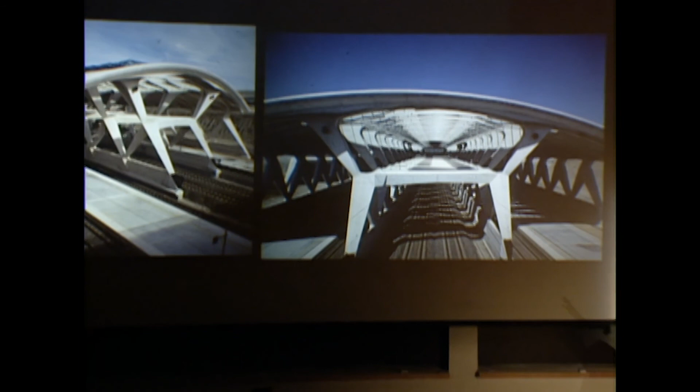You see here, for example, this is the central gallery going from one side to another. And this is also the end, with the buttress done in concrete, which makes the change into the arc in steel. This is the beginning of the arc.

You see also the interior, with the concrete, with the glazing, and then the interior space with the terraces - two views of the interior space. Then also here, the glazing facade, in shadow, because the roof produces a shadow at the interior.

Then here, two views of the station lit up. Those two slides define the end of my talk. I would like very much to thank you for your attention, and thank the school for giving me the opportunity to speak to you. Thank you.